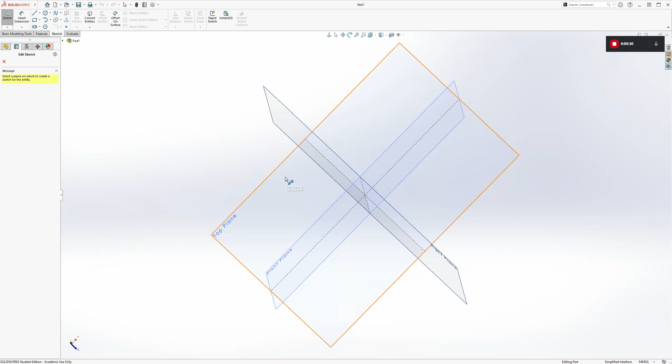So let's get started. First of all, you want your units in MMGS. We're not going to start from the side, instead we're going to draw the sketch from the top, and then from there we're going to cut out our shape from the front. So we're going to start our base extrusion from the top.

And at the origin, you're going to start with a concentric pair of circles.

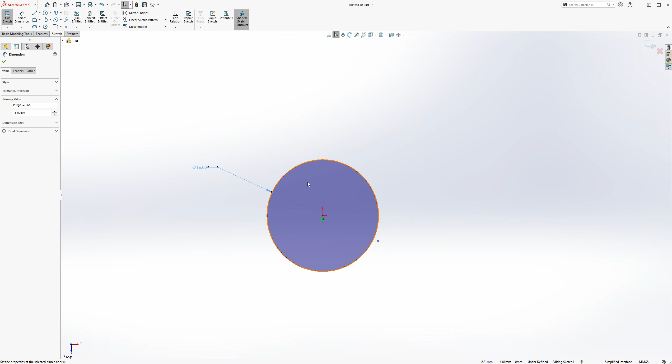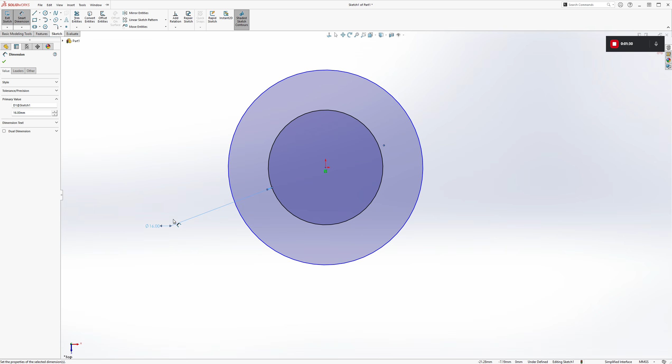If you look at detail view C, you should get all the dimensions you need. So the inside is 10 millimeters in diameter... the outside, oh sorry, no, the inside is actually 16 diameter. And now my other circle's hidden. Wait, hold on. Okay, so the inside is 16, and then the distance between them is 10. That's what it was, so the distance between them is 10.

Okay, from there we're going to make our slit. But it's going to be an angled line, so we need to get our vertical center line as a reference.

Then I'll draw a line. I guess I'll draw the line from the origin upwards like this. Let's angle that line from the vertical to be 30 degrees.

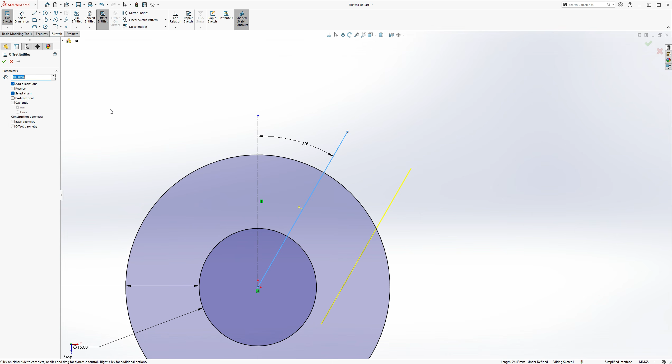And then I think I'm just going to offset it in both ways. So I'm just going to click this. I'm going to offset it bidirectionally by 1, so offset it by 1 and make it bidirectional. That way the total width would be 2. So I'll select OK.

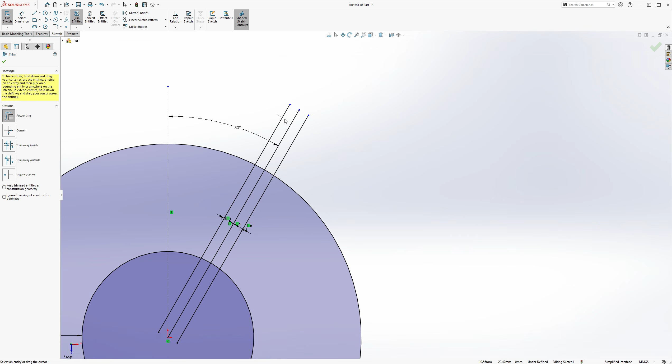Then I guess I'll trim away everything I don't need. So I'll trim away all of this, the middle line... actually I do need that middle line, but I think I'll just make it a construction line, for construction. So I'll say it's for construction. Now trim away all the lines inside of the circle, like this. Should be fine.

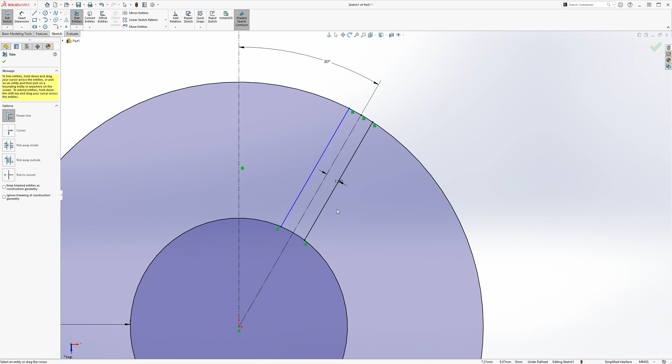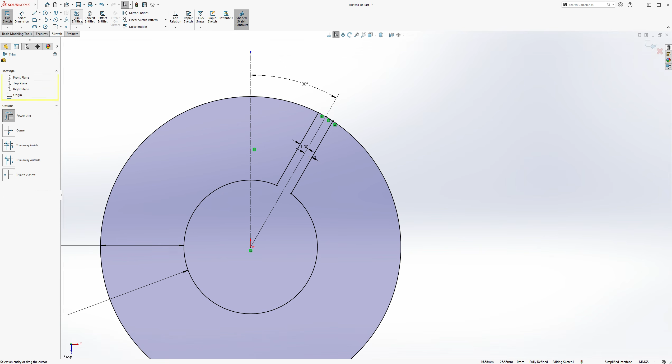Well, so this line should be a distance of 1 from the center line. And that should be that. And let's make sure we close that contour. Actually, I need to shave this off here as well. Okay, there we go.

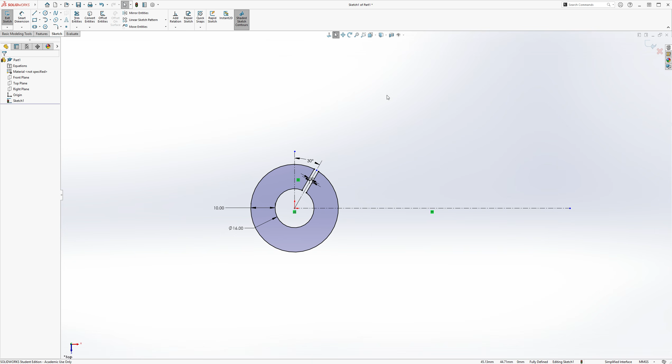So then let's make a horizontal center line going to the right. And I guess I'll just add a corner rectangle. It spans across like this. Make sure its midpoint is coincident with the center line.

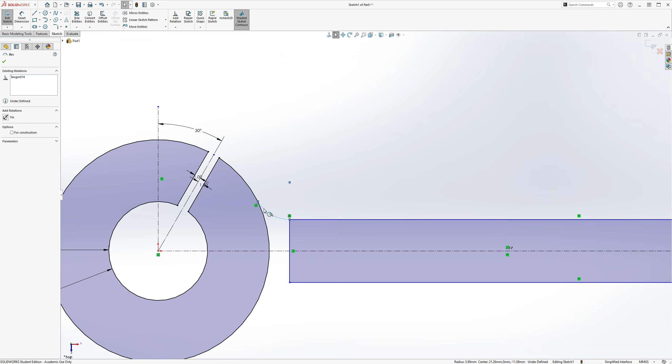Then let me add an arc here. So I'm going to add the tangent arc. It's connecting the rectangle to the circle. Let's make sure the arc is tangent with the circle. Then let's mirror this arc onto the other side.

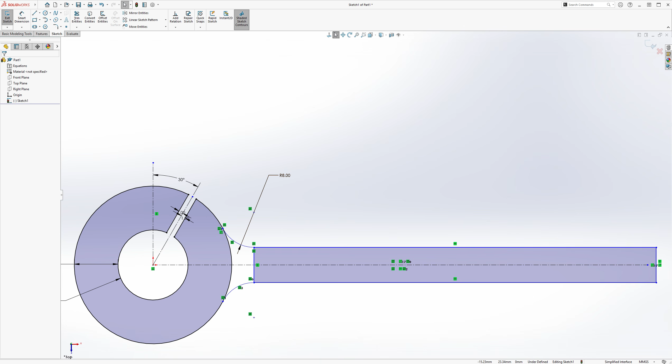Then let's give it the proper dimensions. So this arc is going to be of radius 8. The rectangle should have a thickness of 16. And its length should be, let me see... oh I see, the total length of the part should be 96.

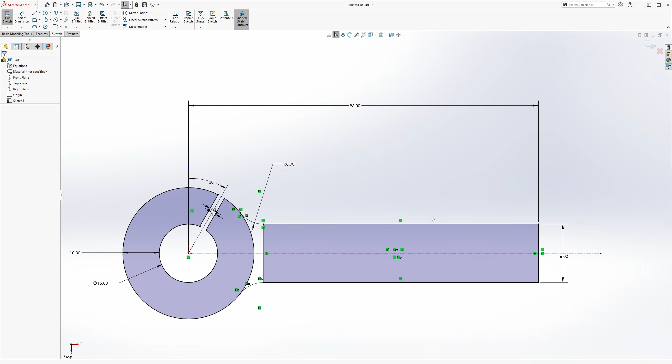But it's actually 96 from the center point at the origin to the far right edge of the rectangle. So it should be like this, 96. And I'm going to trim away the excess of the rectangle, and also this part as well. So that should be your fully defined base.

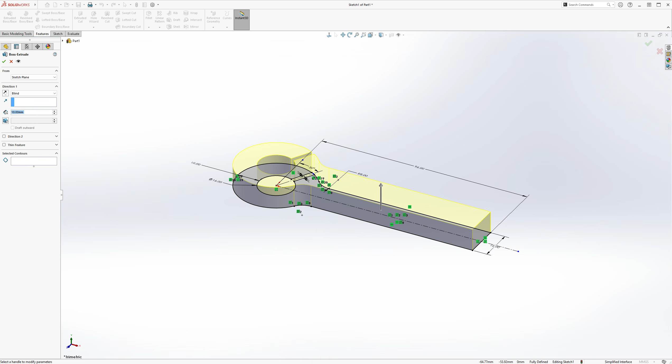So let's go ahead and extrude this. I'm going to extrude it downwards by a depth of, let's see... it should be extruded downwards, so I'm going to reverse the direction, and its depth is going to be 90. Select OK.

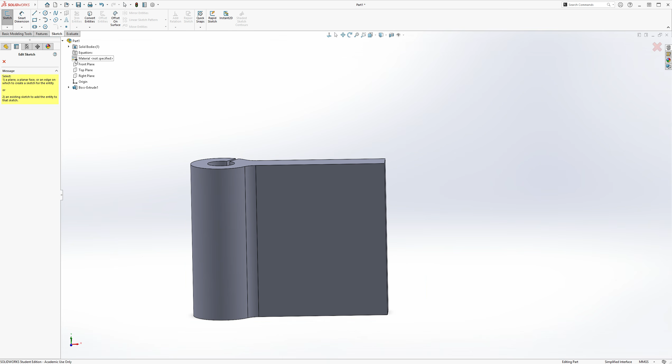So from here we can start making our cuts to get the base part. So I'm going to create a sketch over in the front plane, and then we'll start from the top to the bottom.

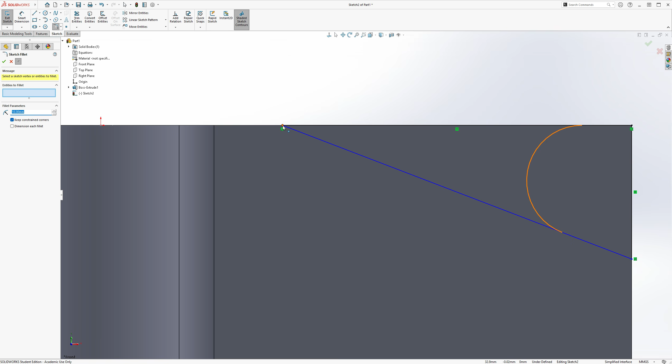So first things first, let's make ourselves a triangle, something like this. Then there needs to be a fillet here, that is an R8 fillet. Oh actually, yeah, let me add a line so that the fillet can actually be in the right position. So the fillet should be here.

I guess first of all we'll measure the triangles first. So the diagonal of the triangle's angle from this edge should be 20 degrees.

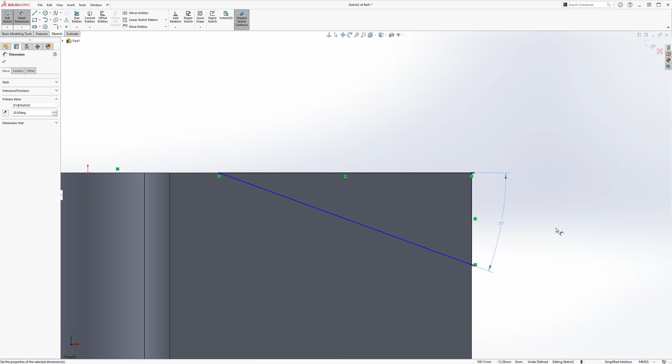But now obviously I can still move the triangle like this, so I need to fix that. Let's see here.

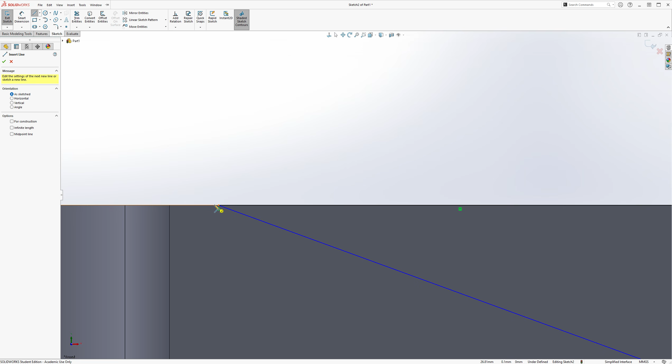Or maybe I'll remove this coincident relation, if I can. Okay, let me delete those lines.

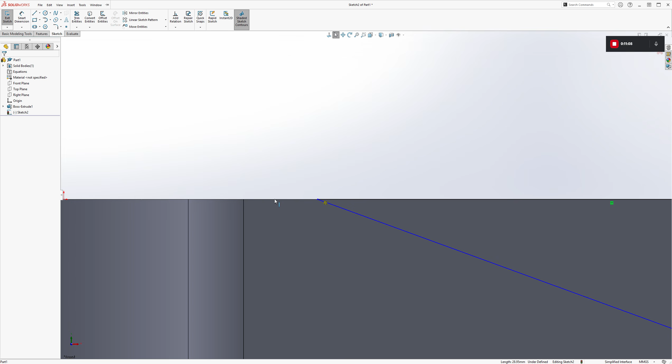So this time I'll try adding the fillet manually, kind of like this. Guess we'll do something like this, something like that. I'll drag this line across until it's coincident with that point.

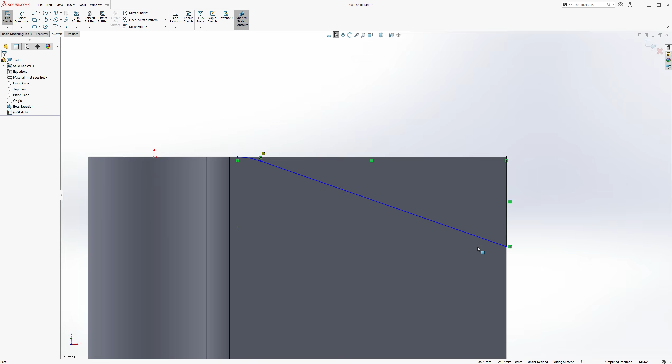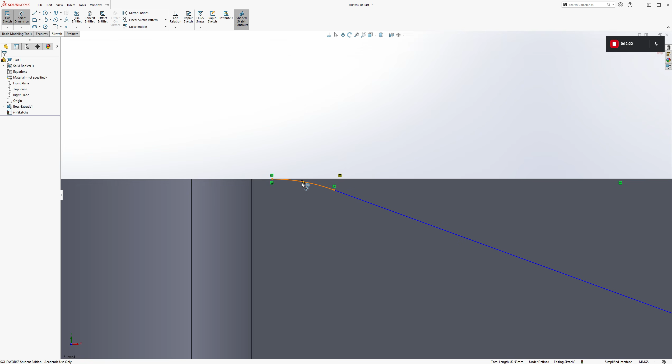Then we'll go back and fix this diagonal line so it's 20 degrees, just like before. Let's make sure this arc is tangent with this edge. Then this arc should have a radius of 8. There's a center point there.

So now, okay, so the distance from this arc's center point to the origin has to be 36. And at this arc center point, you also have a hole.

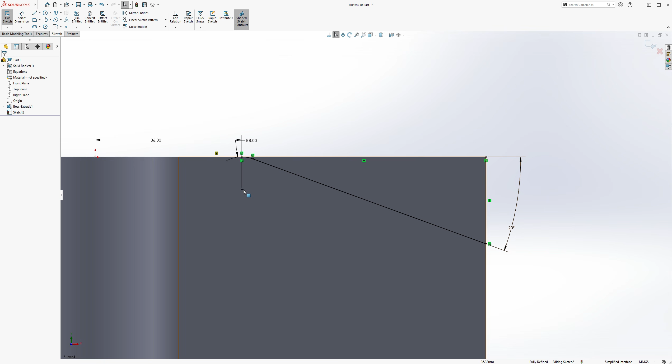So you need a circle. That circle's diameter is going to be 7. And then that's the top part done.

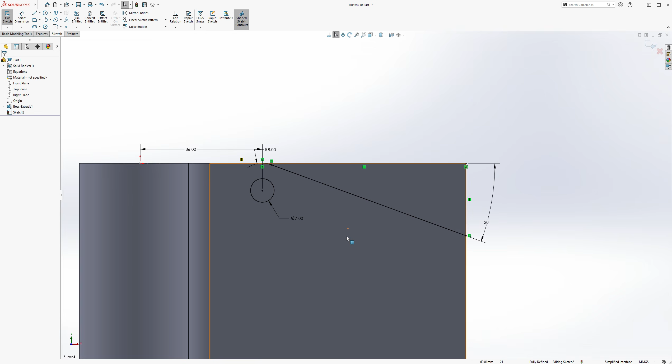I wish I could have just used a sketch fillet tool here, but it just wouldn't let me. I was probably doing it wrong, but yeah. But creating an arc like that manually is the same thing, so it works.

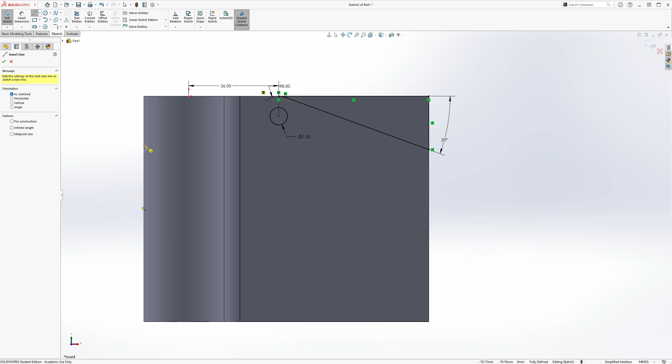Okay, so next of all, we're going to go for the big arc cut on the left side. So I'm going to start with a straight line, straight horizontal line. And this is going to go into a big arc like this, like about here, I guess.

Actually, I'm going to bend it a little. Actually, yes, I'm going to go all the way down here. And it should go into a line that's slightly angled, which will go into a perpendicular line.

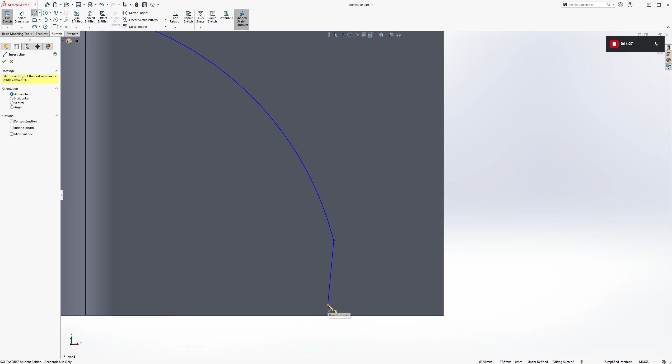Actually, I want this line to be a little further. And I want the perpendicular line to make coincident with the bottom edge, something like that. Yes, something like that. So, okay.

So first of all, I want to make sure that this arc is tangent with this line down here. And I want to make sure that the center point, well, actually, let me fix the arc real quick. So this arc's way too big. It should be an R48 arc.

And then the distance from the arc's center point, which is here, to the origin, its horizontal distance should be 14. Should be 14.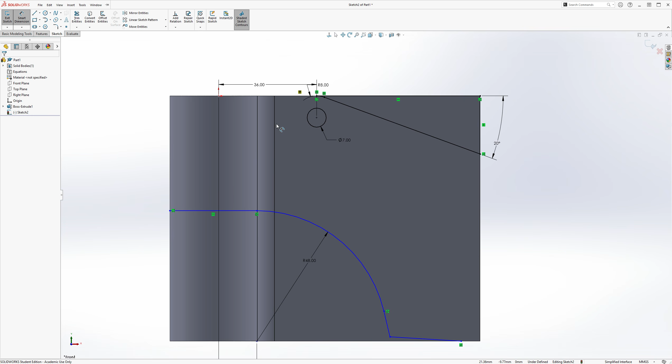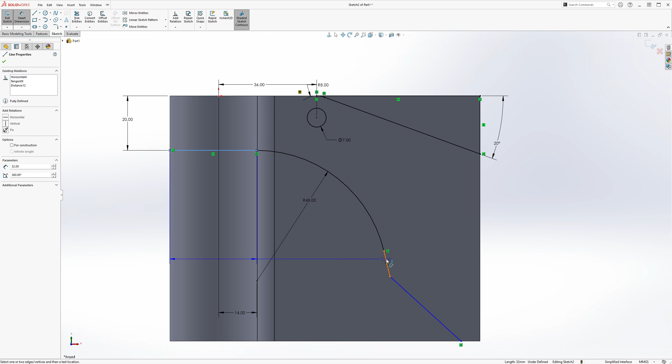And then we can start fixing everything else. So this horizontal line here, its distance from the top edge has to be 20. And then the angle between this horizontal and this angled line way down here has to be 80 degrees.

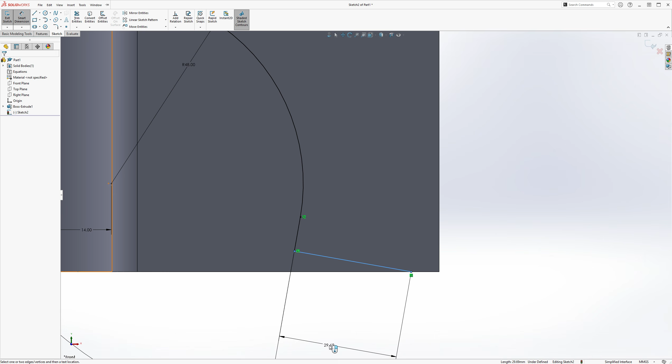And then these two lines down here have to be perpendicular to each other. And then the distance of this line at the bottom here has to be 16. So 16.

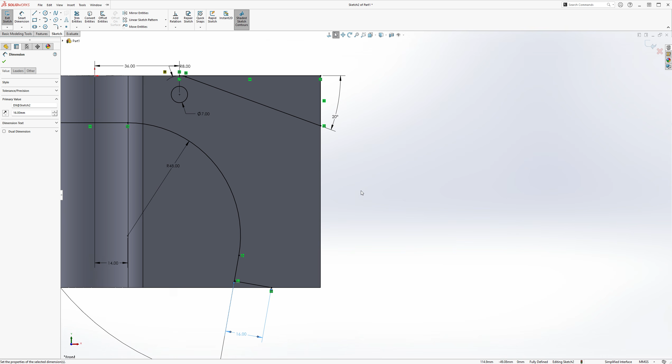So I should fully define everything. So from here, all you need is one more arc. And here we can just use a 3-point arc that connects these two endpoints. And then that arc's radius has to be 135.

And from there, we should be good to go. So I'm going to go ahead and cut everything. So go to Features, Extrude Cut. Then I'll do Through All Both. And I'll select all the contours.

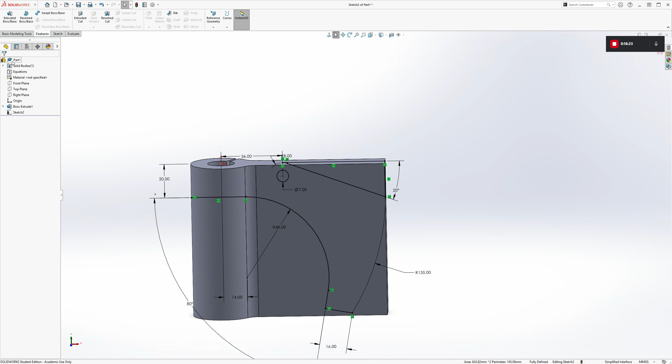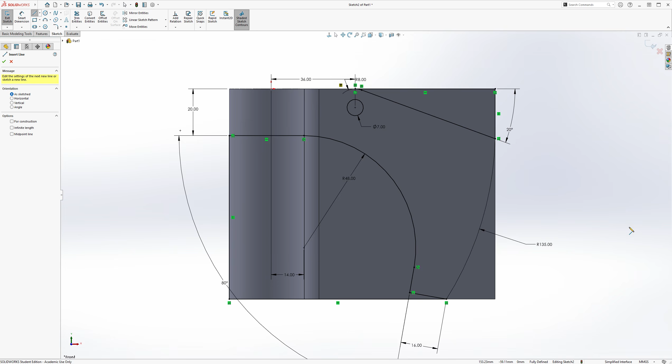Oh, actually, I need to close out some contours. So let me go back to the sketch. So I need to close this one out. Then I also gotta close this one out.

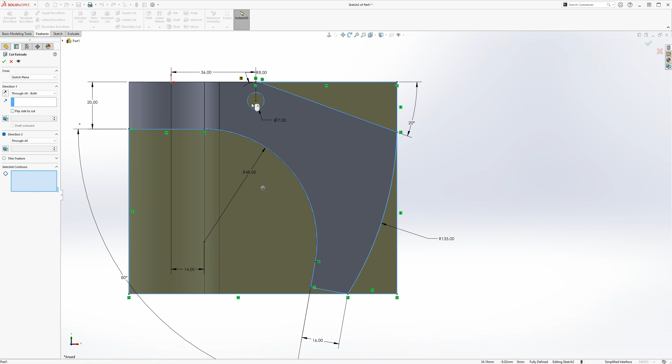That should be it. So let's go back to Features, Extrude Cut, Through All Both, and select this contour, and this contour, along with the hole. So select OK, and there's your base part right there.

So now we can add those fillets. Let me find what the fillets are. Oh yes, okay. The fillets are all R8 fillets. So I'm going to fillets, make an R8.

Yes, and you're basically going to fillet everything. So first of all, you need to fillet, is it this edge or this edge? Wait, no, it's this edge. This edge right here. Or is it this edge? Smooth edges cannot be filleted.

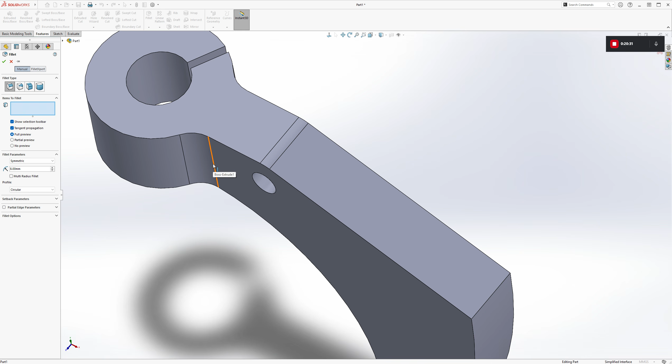Oh, it already is filleted. Oh, I see, because earlier I made an arc here when I was connecting the rectangle. I could have just kept the rectangle and then filleted it later, but I guess it's pretty much already filleted in a way, so we can just continue.

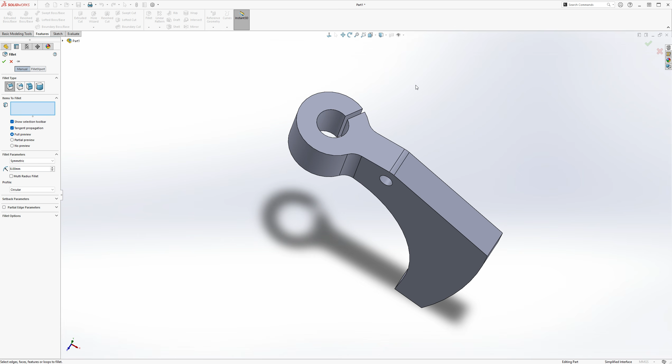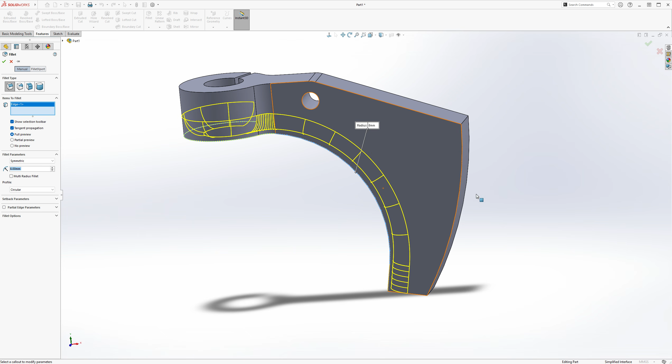I believe the top face is filleted like this. Wait, actually no, it's just the side edges that are filleted. So this edge for sure, and that should be R8, not R10. So R8 fillets, and then the opposite edge as well.

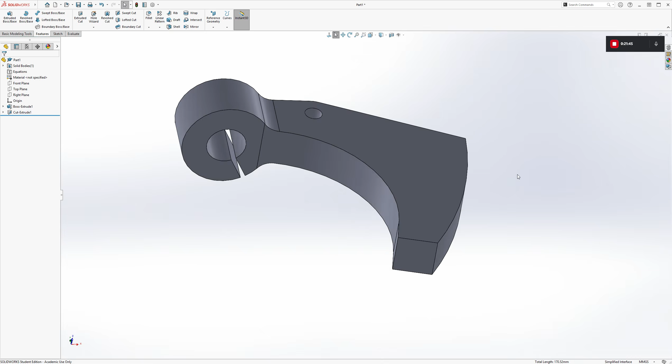R8. Then you got the bottom here. Wait, no, these fillets are way too big, no? These can't be the right fillet sizes. Oh, it's R3, it's R3.

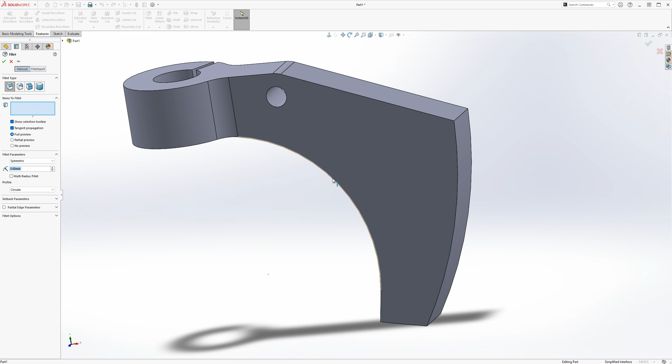So R3, I'll get this part and the opposite side. I'll make sure to get the bottom square here as well, all four parts of it. Okay, there you go.

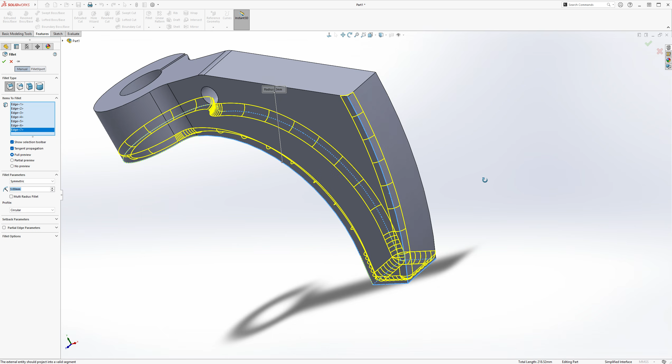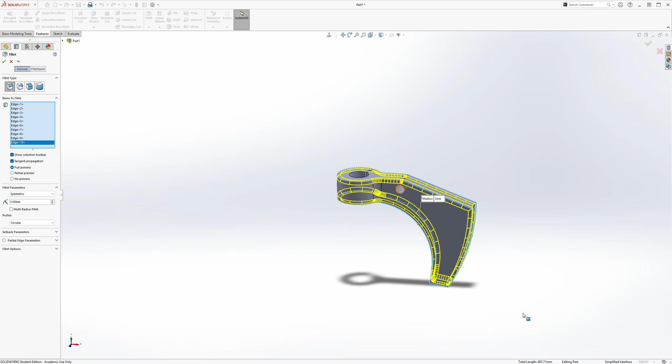Then should be this edge, or this arc I mean. Then along this edge, and that should do it. So I'll select OK, so there's your R3 fillets.

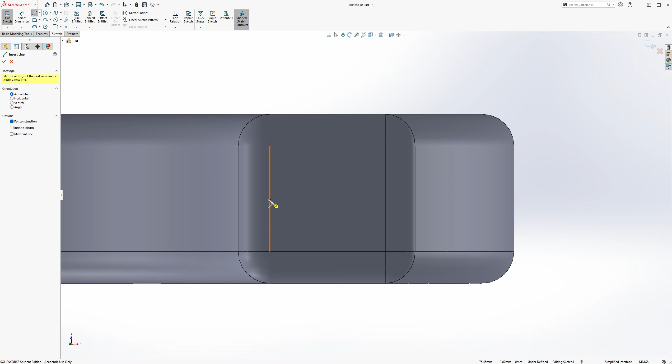And I'm going to make a hole on the bottom stub here. So I'm going to click Sketch on this face, and it's going to be centered in this kind of rectangle area, so let's get a center line, be coincident with the midpoint, so midpoint to midpoint. And then at the midpoint of this center line, I'll make my circle.

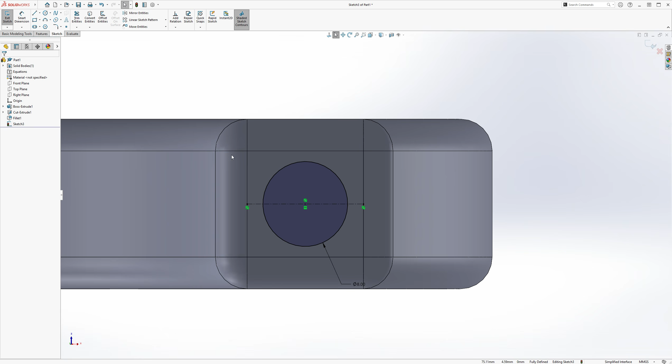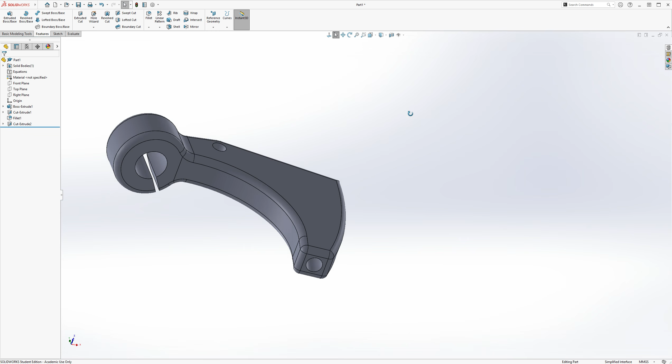And that circle's diameter should be 8. And then we'll just do a through-all cut from there. So it's just a through all. Select OK. And from here we'll do our mid-plane cut.

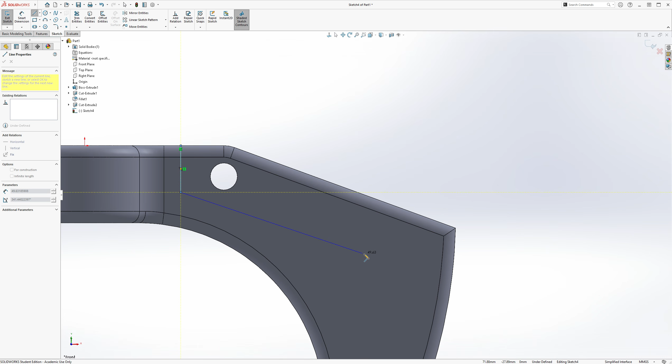So let's make our sketch in the front plane. So it's going to be a straight line down here, it goes into a diagonal, that goes into, I believe, a perpendicular line.

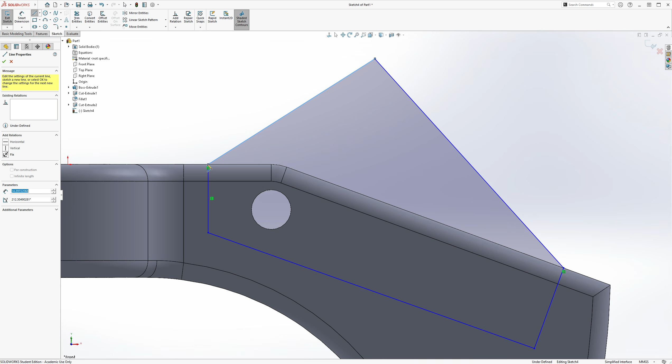And then, well here, because there's a fillet, you can't really use a corner, so you're basically just going to have to over-exaggerate your geometry like this, just to make sure you cut everything, including that fillet right there. That's the main reason I'm doing that.

As long as you get this part cut, that should be completely fine. So first of all, the distance from origin to the vertical line is going to be 26. And then I need a reference for the center of this circle, so I'm going to add a point there. So the distance from this center point, or circle center, to the right side edge is going to be 57 diagonally. And this width is going to be 18.

Then you're going to need 2 sketch fillets. Well, actually first of all, yeah, don't I need the angle of this line? Surely I need the angle. Oh, I see, I think it's implied that this edge right here is supposed to be parallel with this edge. I think that's where you get the angle from.

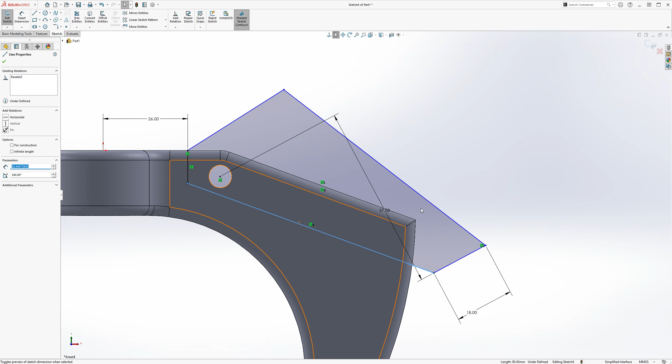So those are supposed to be parallel to each other. So 26, 57, 18. But then obviously this can still move along. Wait, this shouldn't move along. Why is... Oh, I see, the 18 dimension was wrong. I did it between the 2 points, but it's supposed to be between this line and then this line.

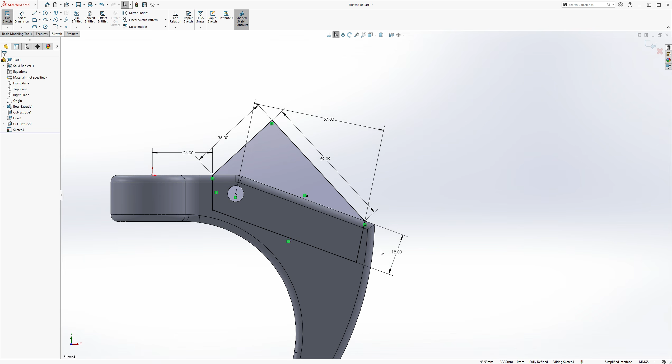That should be 18, I see. Then we'll just have to fix these with arbitrary dimensions, so 35. Let's just make these 2 lines parallel or perpendicular to each other, and I guess I'll give this a length of 39. Oh, what happened? Oh yeah, okay, so it should be like that. So let me double check that these 2 lines are perpendicular, which they should be.

Wait, are they perpendicular? Yeah, these 2 lines should be perpendicular. So these 2 lines are parallel, these 2 lines are perpendicular. This is 18, 26, 57, yes, this should all be correct.

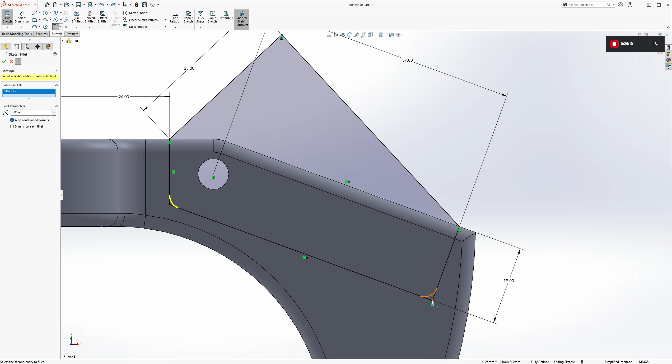Okay, I see, so from here we can make our mid-plane cut. Oh, actually first we need our fillets. So the sketch fillets are going to be R3 fillets. They're going to be at the bottom 2 corners, here and here. And then we'll do a mid-plane cut.

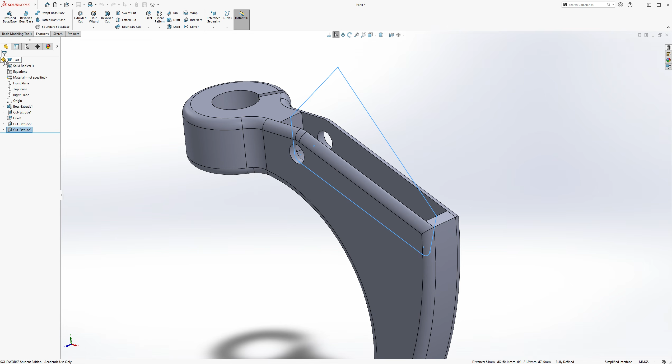Of 10. And then you select OK. And now cut everything so you get that kind of slot in there. So that should be your whole part, all the fillets attached as well.

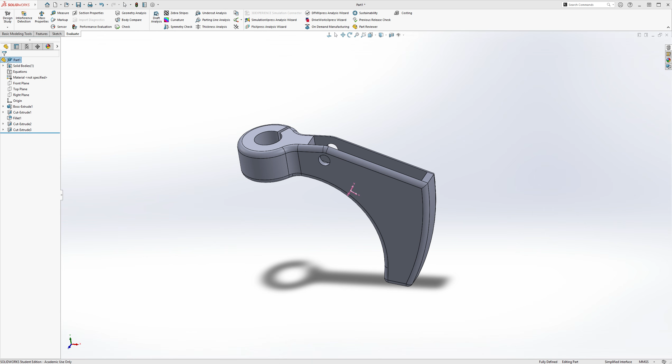So okay, let's go check the answer. I'm going to go to Evaluate Mass Properties, and for my volume I'm getting 53,258 cubic millimeters for my volume. 53,258. So I hope you learned something from this video, and I'll see you in the next one.